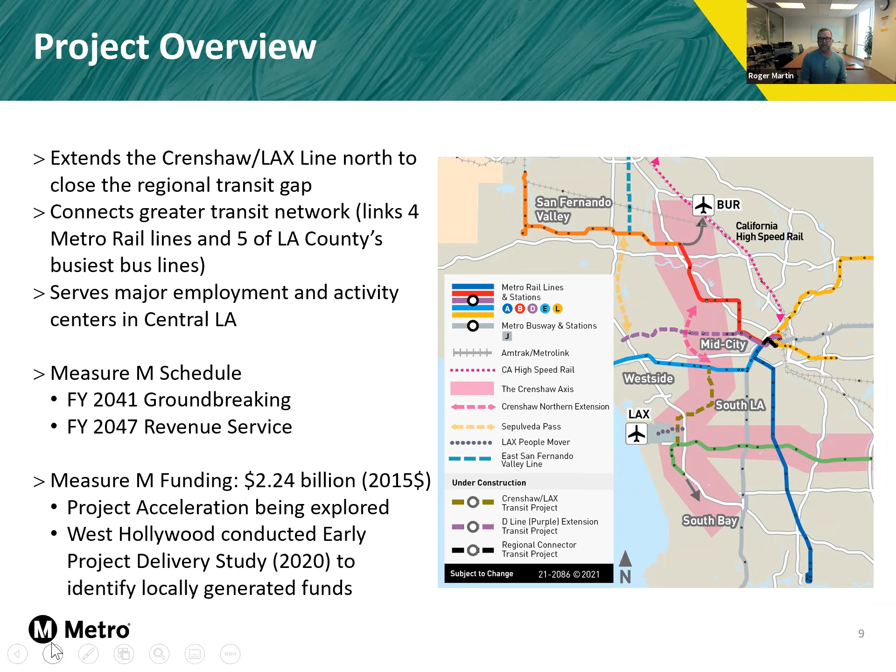However, efforts to accelerate the project are being explored with the cities of West Hollywood in coordination with the city of Los Angeles and Metro, conducting an early project delivery study in 2020 to identify alternative funds that could potentially help build the project sooner. And with that, I have the next slide here.

The project aims to satisfy multiple objectives, including closing the regional transit network gap. We want to provide a fast and reliable transit alternative to congested highways and roadways. As many of you know, the project area is pretty congested out there.

This is due to the concentration of jobs, residents, and major destinations within the central region. At the same time, travel within and through this area is greatly constrained due to the high demand for travel to and from this area, coupled with limited roadway access.

We want to improve mobility and accessibility, not just within the project area in central LA, but throughout the county and a wider region. And we want to cultivate a transit-friendly environment and maximize the potential for smart population and job growth.

So if this project were to be constructed, the project would greatly improve mobility and access to jobs and opportunities for all county residents, especially transit-dependent residents in equity-focused communities from South Bay and South LA, all the way north to the San Fernando Valley. And with that, Alex is going to take you through the alignments and options.

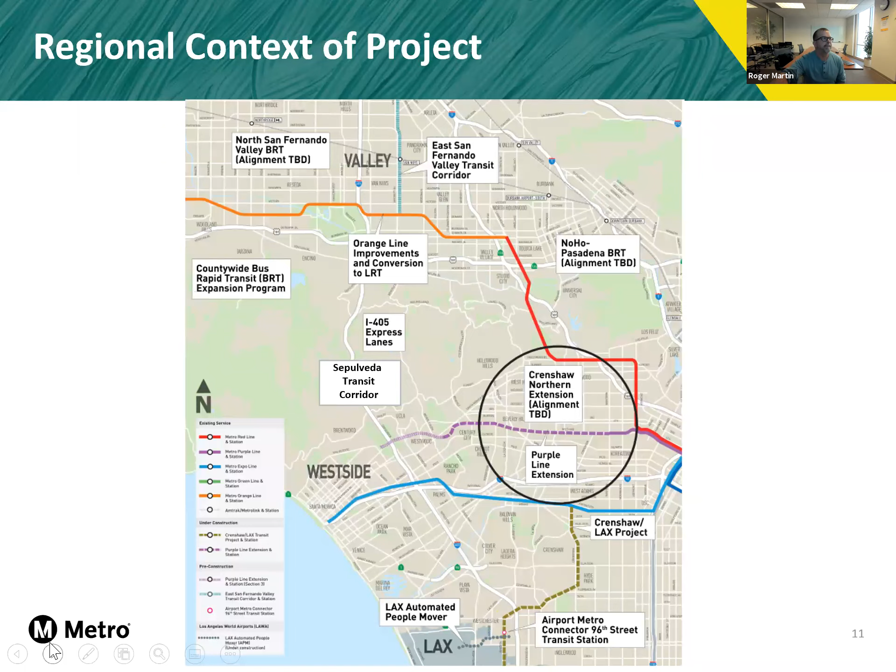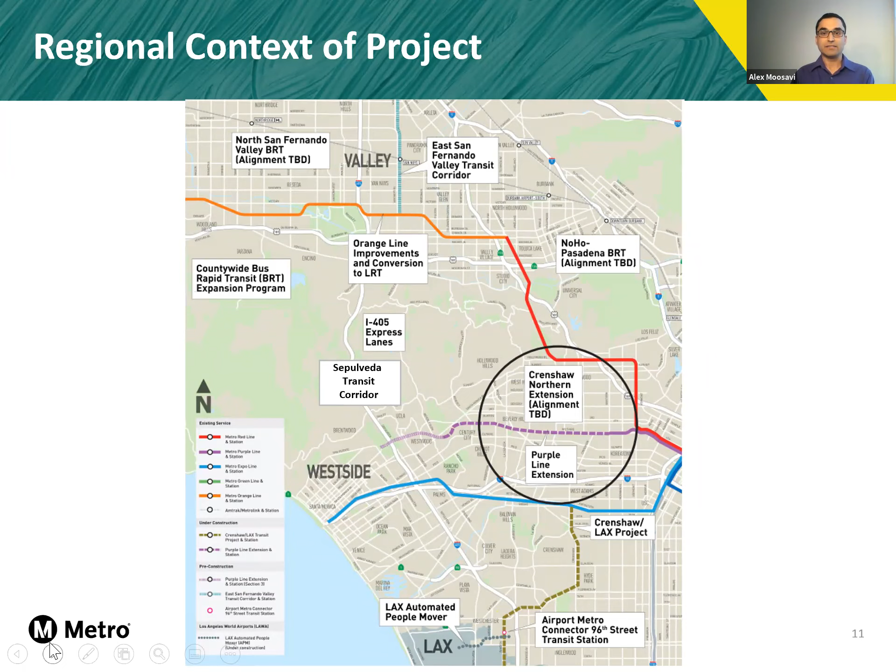Thank you, Roger. This next map shows how the project fits into the overall transportation network and other Measure M projects underway in this general area, including the Purple Line extension, which will open in Beverly Hills in 3 years and all the way to Westwood by 2027. This project would directly connect to the Purple Line in the Miracle Mile area. To the north in the San Fernando Valley, there's the North Hollywood Pasadena Bus Rapid Transit Project. And on the west side, there's the Sepulveda Transit Corridor, which will link the San Fernando Valley to the west side and ultimately LAX.

Before we go into the specific alternatives for the project, here's a brief history of some of the past studies related to our current efforts. From as far back as 2003, planning studies for the Crenshaw LAX line have explored opportunities to extend the line all the way to Wilshire and the Purple Line, and even further north to Hollywood. However, due to funding constraints, any segment of the line north of the Expo or E line was eliminated from the Crenshaw LAX line project back in 2009. At roughly that same time, the West Side Subway Extension EIR was studying a potential heavy rail extension from Hollywood through West Hollywood and Mid-City West to the Purple Line on Wilshire.

The current studies for a northern extension of the Crenshaw LAX line began in 2016 with the passage of Measure M and Metro's board commitment to bring this project, along with others, to a shovel-ready status in case of potential funding opportunities for project acceleration. An initial alternative study was completed in 2018, followed by an alternative screening study last year in 2020. This next map shows the initial 5 alternatives that were explored in the alternatives analysis study.

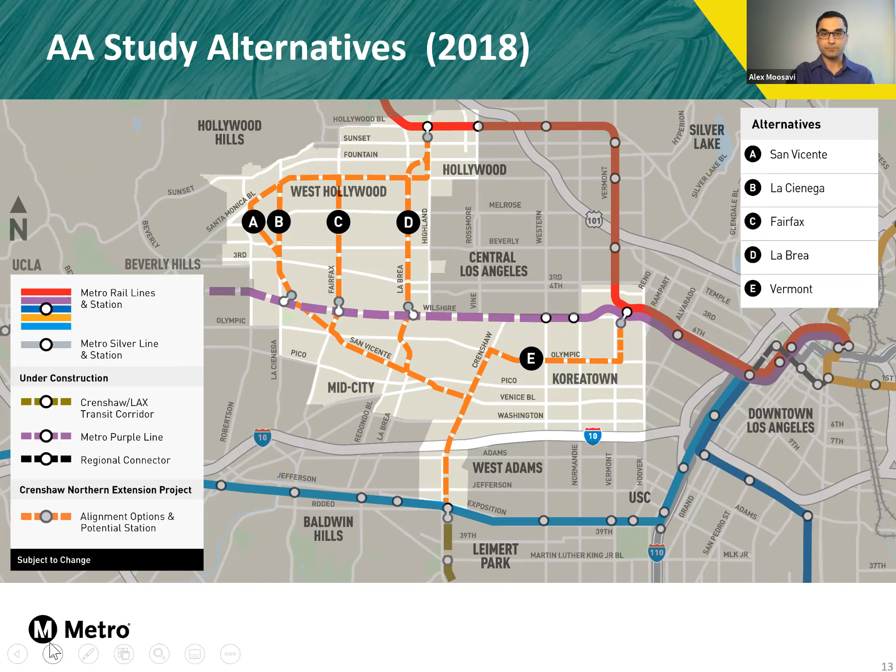From west to east, they were San Vicente, La Cienega, Fairfax, La Brea, and Vermont. The alternatives analysis study showed that all alternatives to Hollywood would attract significant ridership, with approximately 90,000 boardings or more on a daily basis. The La Brea alternative is the shortest, fastest, and most cost-efficient alignment. It's the most direct route between Mid-City and Hollywood, with a minimum total of 6 new stations over about 6.5 miles. Part of the original alternatives analysis study looked at existing jobs and residents within just a half-mile walking distance of all the alternatives that extend to Hollywood.

This analysis showed that while all of the alternatives serve a significant number of jobs and residents, the Fairfax and Fairfax-San Vicente alternatives and stations serve the most jobs and residents by far, by directly linking some of the biggest job centers in the region, including places like the Grove Farmers Market, CBS Television City, the Pacific Design Center, and Cedars-Sinai Medical Center campus. This jobs and residents analysis showed that compared to the La Brea alternative, the Fairfax alternative would serve more than twice the number of jobs than La Brea, and the San Vicente alternative would serve more than quadruple the number of jobs than La Brea, or double that of Fairfax. Even when broken down by distance, the longer Fairfax and San Vicente alternatives would serve significantly more residents and especially jobs per mile than La Brea.

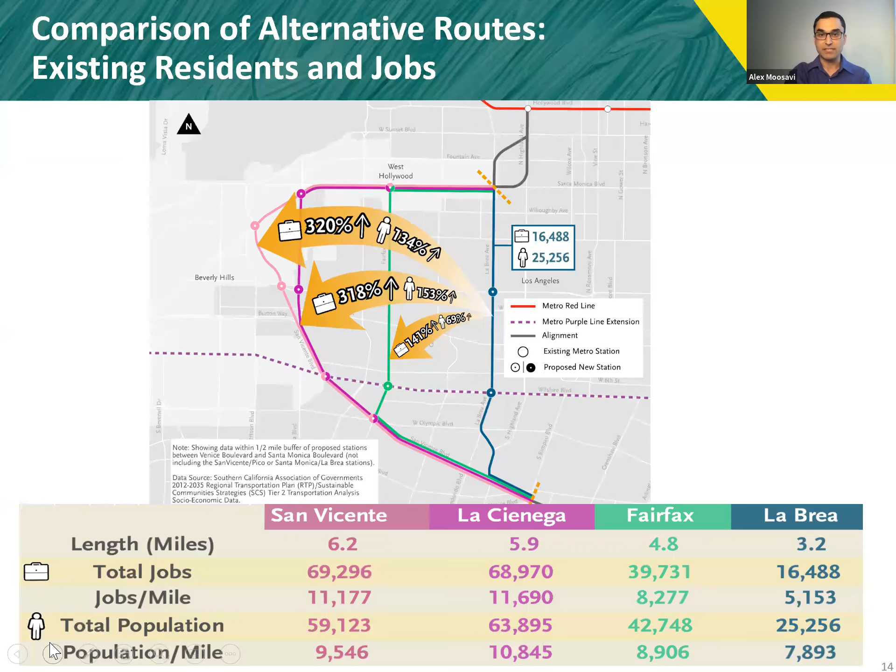In line with this analysis, existing transit ridership near potential project stations also reflects the heavy activity and congestion near some of these major job centers. Transit ridership near the Fairfax alternative stations is roughly 3 times that of the La Brea stations, while transit ridership near the Fairfax-San Vicente alternative stations is over 4 times that of the La Brea alternative.

This has largely been reflected in the comments we have received to date regarding the project. We've had several opportunities for public meetings throughout the previous studies and have collected a significant number of comments so far, many of which have shaped the current alternatives and options under study. Overall, we've heard strong support for accelerating the project and opening it sooner than the Measure M schedule date of 2047. We've also heard preferences for the project to serve some of the major destinations and job centers in the western half of the project area, including a desire to combine alternatives or build more than one or even all of them.

All of these alternatives would be entirely underground in a subway configuration, with the potential exception of a small section along San Vicente Boulevard in Mid-City between Stanley Avenue in the west and Midtown Crossing in the east, which I'll get to shortly. Before I go through each of the alternatives, I'd like to emphasize that all alternatives have the same station locations, both in the north and in the south.

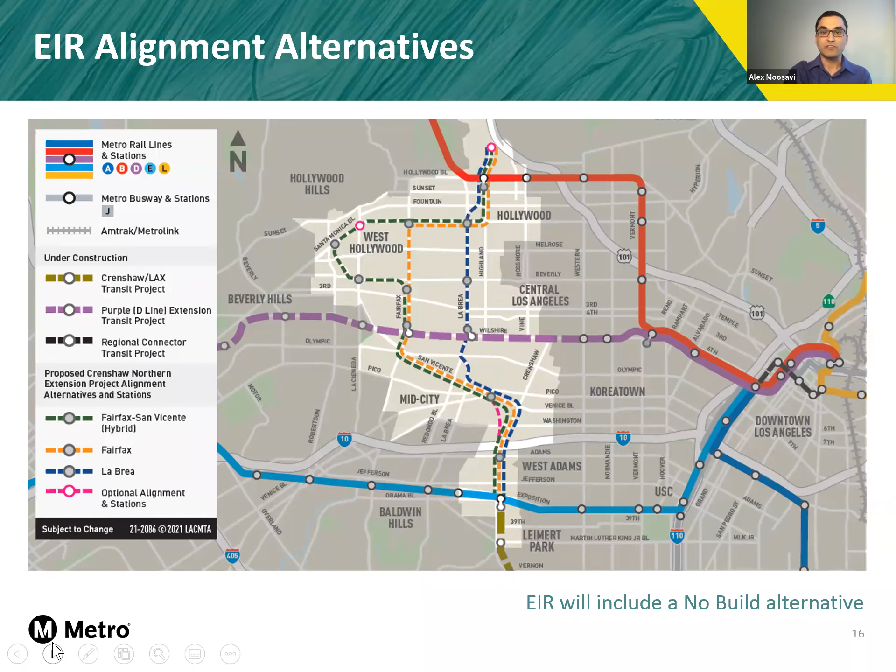As I mentioned before, the La Brea alternative would have a minimum of 6 stations over about 6.5 miles. The total travel time between the Expo line at Crenshaw Expo all the way to Hollywood Highland would be just over 12 minutes. This next map gives some more context to the La Brea alternative, as well as the two longer alternatives that I'll go through now, Fairfax and Fairfax San Vicente, or the hybrid alternative.

The Fairfax alternative would follow San Vicente Boulevard from Mid-City's Midtown Crossing Station, then Fairfax Avenue, north through Miracle Mile and Mid-City West, with additional stations at Wilshire Fairfax to connect to the Metro D or Purple Line, and on Fairfax between 3rd and Beverly, near the Grove and CBS Television City.

It would then continue north to a station at Santa Monica Fairfax in central West Hollywood and proceed, just like La Brea and all the alternatives, to Santa Monica La Brea and Hollywood Highland with an optional extension to the Hollywood Bowl. This Fairfax alternative would have a minimum of 7 stations over 8 miles, with the total end-to-end travel time to Hollywood Highland of about 15 minutes, or 3 minutes longer than La Brea.

And finally, the third alternative is this Fairfax San Vicente, or hybrid, alternative. This alternative would follow the exact same route and stations as the Fairfax alternative, north to a station at Wilshire Fairfax and Museum Row, and a station under Fairfax between Beverly and 3rd near the Grove and CBS.

From there, it would veer west under Beverly Boulevard to a station at Beverly and La Cienega, near the Beverly Center, Beverly Connection, and Cedars-Sinai Medical Center campus. It would then head north to a station at Santa Monica San Vicente to serve the Pacific Design Center, West Hollywood's Rainbow District, and the Sunset Strip.

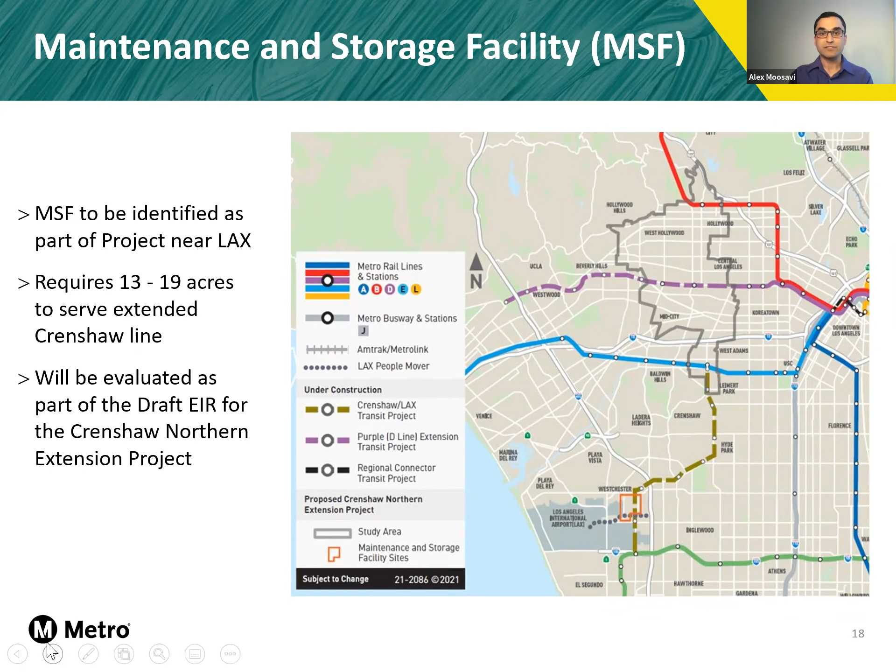Regardless of alternative, each line and extension, including this project, requires a maintenance and storage facility for the additional light rail vehicles that will be needed to operate the full line from South LA and LAX all the way to Hollywood. The draft EIR will explore several potential sites for this facility adjacent to and near the current Southwestern Yard being constructed for the Crenshaw LAX line, located just northeast of LAX airport around the intersections of Aviation and Arbor Vitae.

In addition to the three different alternatives, there are several design options that we would like your input on, which are shown on this map. I'll go through each one, starting in the south with the alignment options between West Adams Station and Mid-City.

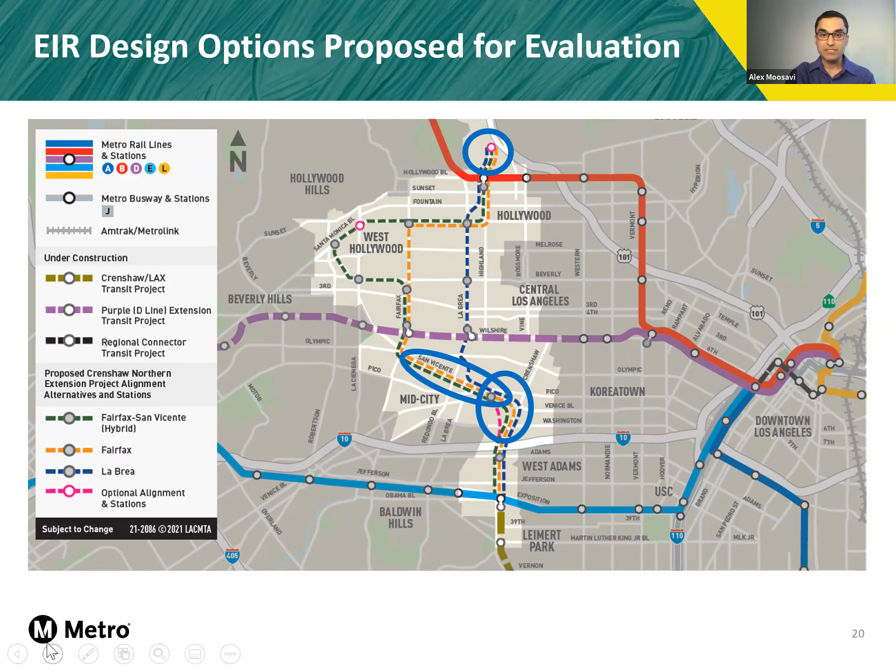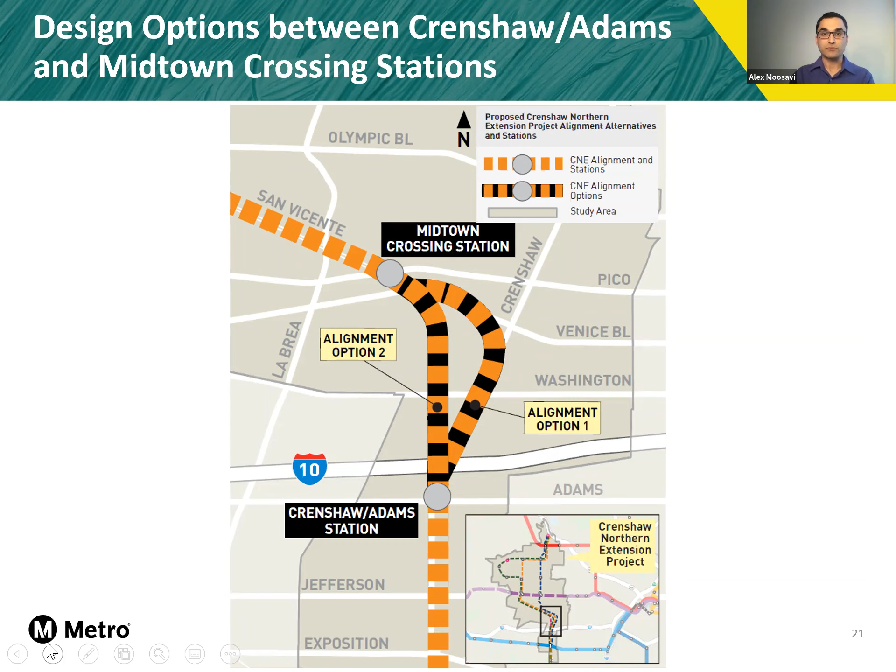As you can see on this map, we have two route options that would link the Crenshaw Adams Station in West Adams and Midtown Crossing Station in Mid-City. Alignment option 1 would primarily run below the major roadways of Crenshaw and Venice Boulevards, while alignment option 2 would follow a shorter, more direct route between the two stations.

The vast majority of the project, if not the entire project, would be in a subway or underground configuration. Depending on this next option, the entire project could be 100% subway or underground from end to end.

We previously shared a vertical profile option that included potential at-grade rail in the median of San Vicente Boulevard through Mid-City, between Stanley Avenue just south of Olympic, and La Brea Avenue, where it transitioned up to an aerial structure to serve an aerial station at Midtown Crossing before going back underground near the West Boulevard Bridge.

Based on feedback we've heard from the community, we have now added a fully underground design option for this section, including an underground station at Midtown Crossing.

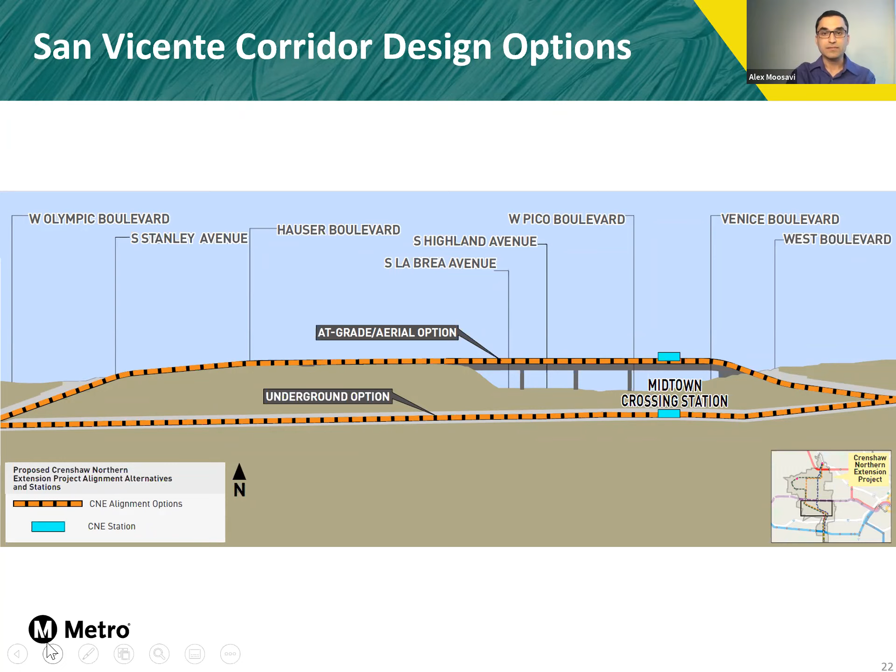It should be noted that the rest of the project, regardless of alternative or option, would run in a subway or underground configuration due to a variety of major factors, including traffic volumes and congestion, roadway widths and capacities, adjacent land uses, and the need to be grade separated at major intersections. This includes everything north of Olympic Boulevard and south of Venice Boulevard.

With this San Vicente subway option included, the entire project, regardless of alternative, would be 100% entirely in a subway or underground configuration. And finally, at the northern end of the project, we've added an option to extend the line further north from Hollywood Highland and the Red or B Line connection, with the potential northern terminus station at the Hollywood Bowl, near Highland and the 101 freeway.

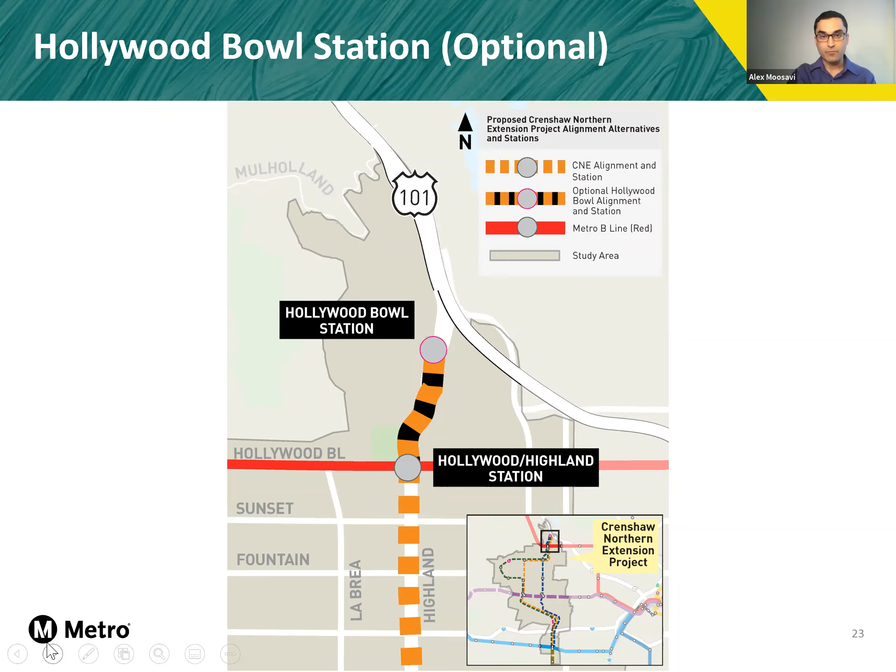And now Roger will take us through the EIR process and next steps for the project.

Thanks, Alex. So as we mentioned before, we're currently in the state environmental clearance phase of the project with the draft environmental impact report, as well as doing the advanced conceptual engineering. Advanced conceptual engineering is used to help support the environmental document.

Following the advanced conceptual engineering, the project will need to go through further engineering and design work, including possible federal environmental clearance, if any federal dollars are attached to this project in the future. After that, final engineering, design, and construction can begin, followed by revenue service of the line.

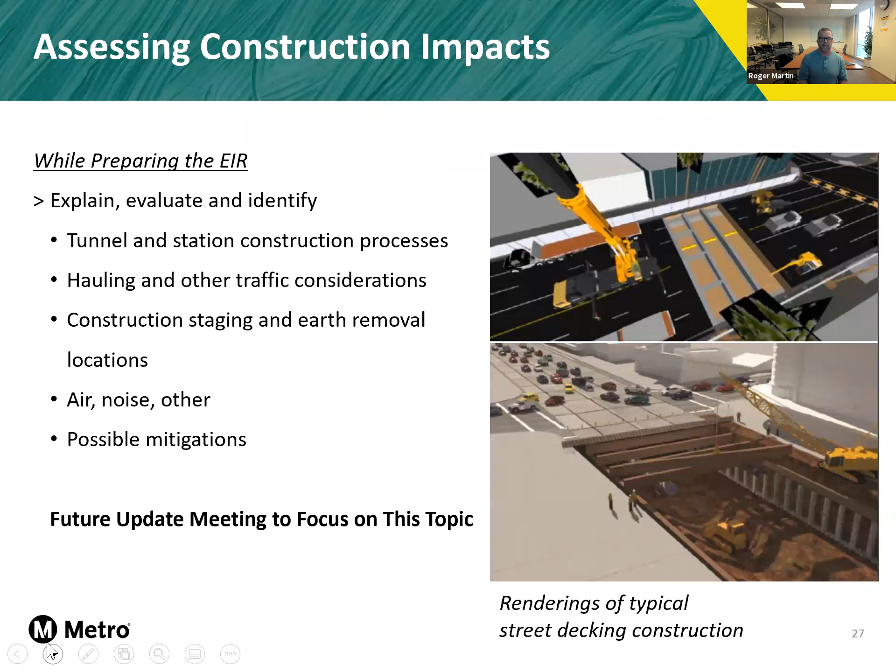Now the funding considerations. The EIR will include a more detailed analysis of cost for the project alternatives, building off the initial estimates from the previous study. Each of these alternatives will cost more than the Measure M allocation for this project, so other potential funding sources would be crucial to project feasibility. These sources could include federal, state, and/or local funding, as well as value capture mechanisms and potential public-private partnerships that could help shoulder some of the extra costs.